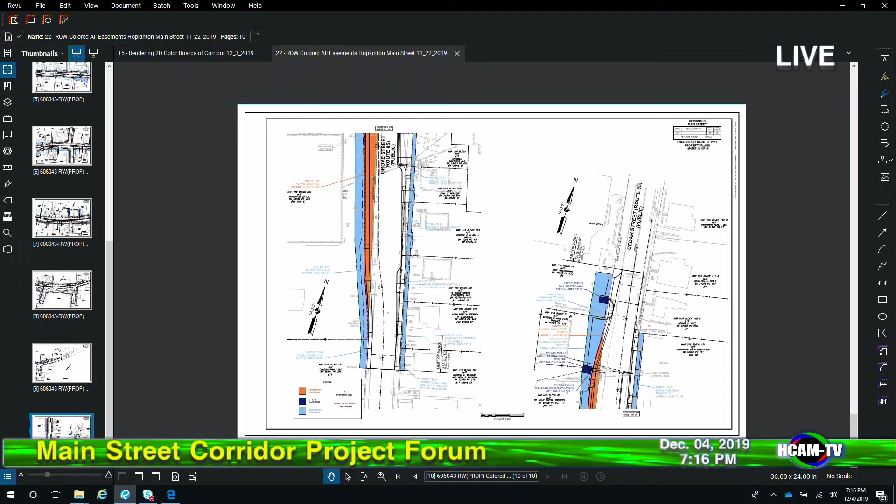So maybe scroll through a couple times as Joe finishes his thoughts. I'll finish with questions since I'm not an expert on this. But again, half of the count shows that half of the permanent easements are related to utility easements, and the other half are non-utility.

Looking at the permanent non-utility easements, by my count two-thirds relate to five properties—I think those are around the main intersection, the Sunoco, Cross Point, and a couple others, so maybe you can identify which those are. The other permanent non-utility easements, I believe 11, relate to 11 individual properties, one each, mainly pertaining to sidewalk easements. Is that right, or do you want to walk us through it?

I can go through the project from beginning to end. At the very beginning limits, we aren't taking temporary easements for the first couple of properties within the limits of work. However, as we go along, the light blue is temporary, the orange are permanent, and the dark blue are permanent utility easements. The orange are taken for a variety of reasons.

You've mentioned two of them for sidewalk purposes or for the realignment of the roadway at the major intersection. At this location, there are a couple of smaller ones for signs or for mast arms for the signal at this intersection, or in this particular case, this driveway is being included as part of the signal timing. So they have a loop being placed in their driveway, so it will also call the signal. So there's a permanent easement there, so that can be maintained.

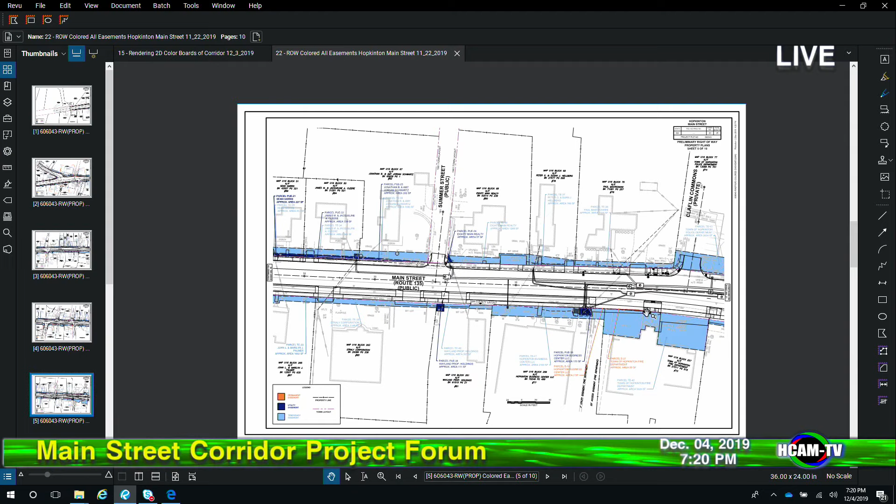Again, mostly temporary easements in this area. There is a very small sliver of a permanent easement across here, just for minor widening of the sidewalk in order to maintain a minimum sidewalk width to meet Mass DOT standards. When you say a minor width there for that sidewalk, how many inches or feet is that, roughly? It varies from basically an inch up to, at the widest point, about a foot. There's a little kink in the layout line right here, so we're smoothing that out.

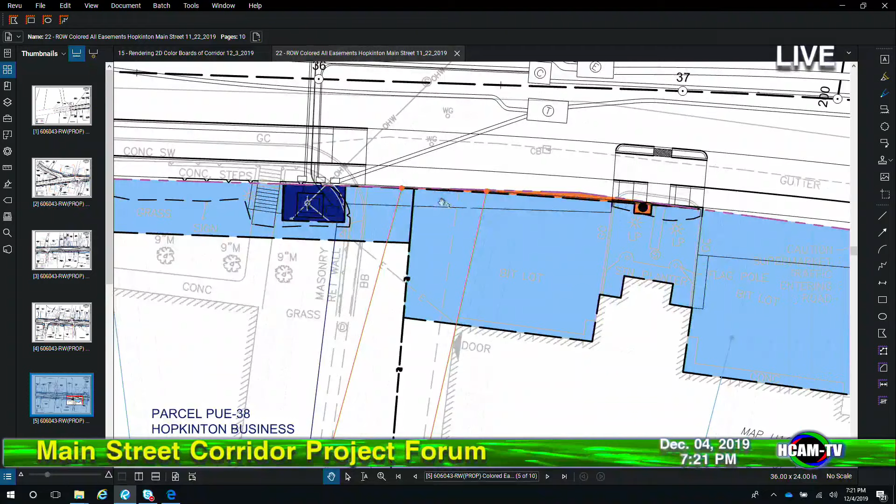This permanent easement here is for the new signal post for the new hybrid signal going in at this location. It will act as a flashing beacon for pedestrians to cross, as well as provide the police and fire departments access to get their vehicles out quickly. It will call the signal, they can press a button, and it will stop traffic on Main Street to allow them access out. So that's a major safety improvement.

Amanda, why is the temporary easement so wide on that lot or two right there? So part of it is because we are putting in the Opticom system, which is what they'll use to trigger the signal, so we have to run conduit into their property. In addition, this is in the area where the undergrounding is beginning, and we have to run a new underground connection to these buildings, so we're taking temporary easements up to the building face in this case.

Which property, is that the fire station? Yep, that's the fire station. This is a town property. I would like to point out, as Amanda goes through this, the light blue area represents the temporary easements, and about 65% of that area is used as a convenience area for the contractor to actually perform his work. There's a good chance he may not even access that full area of the easement, but it's provided just for the convenience of doing the work.

The state makes us provide that extra buffer for convenience, so they're not working from one side all the time. We've all driven around Massachusetts and seen these projects elsewhere, and one thing I'm worried about is the staging of piping and construction vehicles in the evening. How are we going to manage that in our downtown area? Does the easement allow for piping to be staged overnight for drainage and so on?

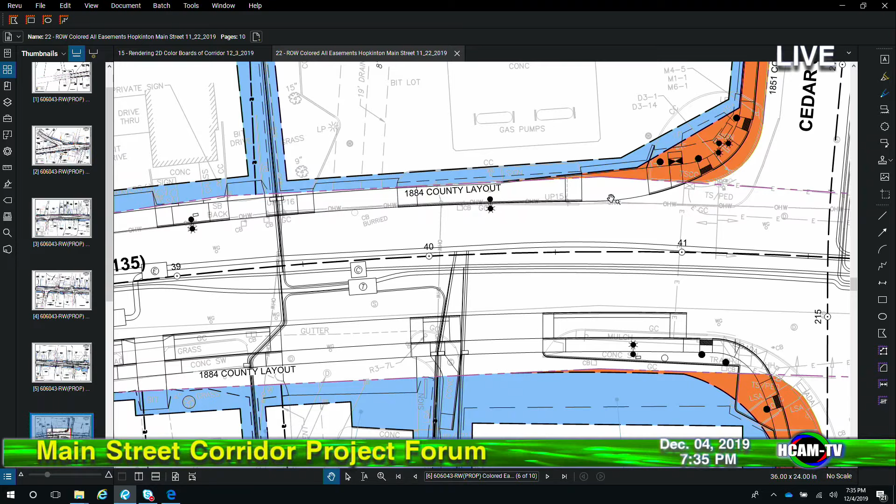It varies in width. Some places it's 60 feet wide. So if the existing roadway is only 30 feet with two 5-foot sidewalks, they have an extra 20 feet of right-of-way that they haven't utilized yet.

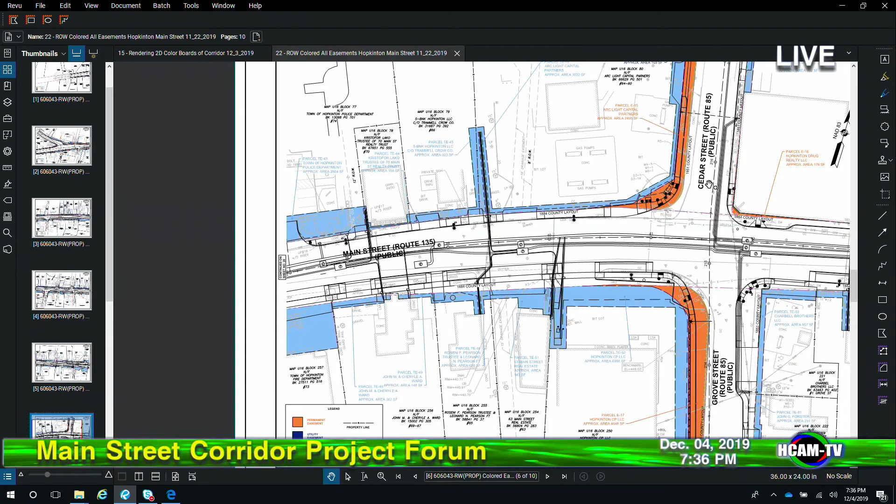It does vary in width out here, but the layouts do vary from year to year. This one, Cedar Street, was laid out in 1851. So they are old in some cases, and they've been updated over the years in other areas, but these have been in place for years.

This is a common thing we see in our projects, because when the layouts are established in the 1800s and 1900s, whether it's a 60 or 80-foot right-of-way, people are accustomed to seeing the edge of roadway as being, oh, that must be where the property line is. And when you think about how these roads were laid out for horse and buggy or whatever the accommodations were then, the cross-sections could be tighter.

So as traffic becomes more prominent and a variety of different users use the road, whether walking or biking, the cross-section creeps and starts to increase from what it was in the 1900s to current standards. That's where people see that their curb's moving in and think you must be taking their property. In fact, a lot of people don't realize that the first 5, 10, 15 feet to get to that 80 feet, 60 feet, or whatever the roadway cross-section is, it becomes a little surprising.

So I think it's important to recognize the technical aspects of the right-of-way and these various widths. But I also think it's important to recognize that we've got folks who've lived along this corridor, some for 40, 50, 60 years, and they're used to seeing that grass.

And I spoke with one of them. I've actually spoken with several of them recently. One of them was at an address where there's that stone wall, and we've got to move it.

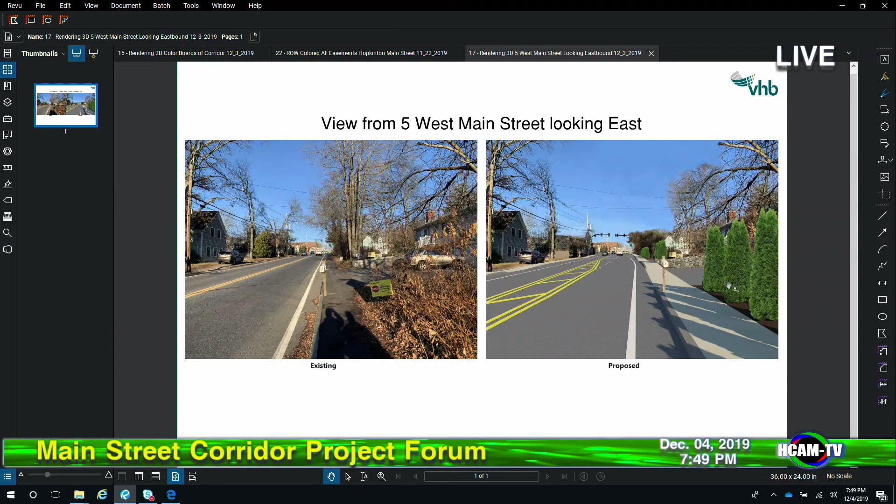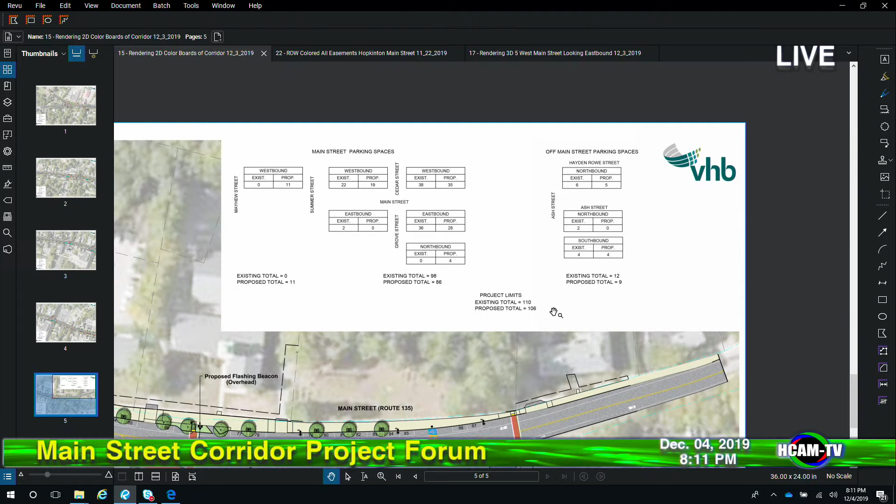Overall, there were 110 existing parking spaces. In the final condition, we have 106 proposed. Some of that was because we took out a couple of parking spaces on Ash Street, and in other areas because of the inclusion of bicycle accommodations. We also had to remove spaces here or there because of hydrants, which you can't park too close to, or crosswalks, which have regulations requiring you to stay 20 feet away. We did our best to maximize what we could get out there, using the tightest spacing we could while still making them parkable. You don't want someone getting stuck out there.

So we also looked at trying to carve in new parking in some areas because we had to eliminate it in others. So while a couple of parking spaces were eliminated here, we were able to carve in new parking on the opposite side of the street.

It's important that we point out the pain points when it comes to parking. This is the Muffin House, a fairly new business in town, which has 2 parking spaces outside it today, if I remember correctly. Those 2 parking spaces unfortunately can't be saved, but we did add additional parking across the street. So there's a bit of a dynamic there.

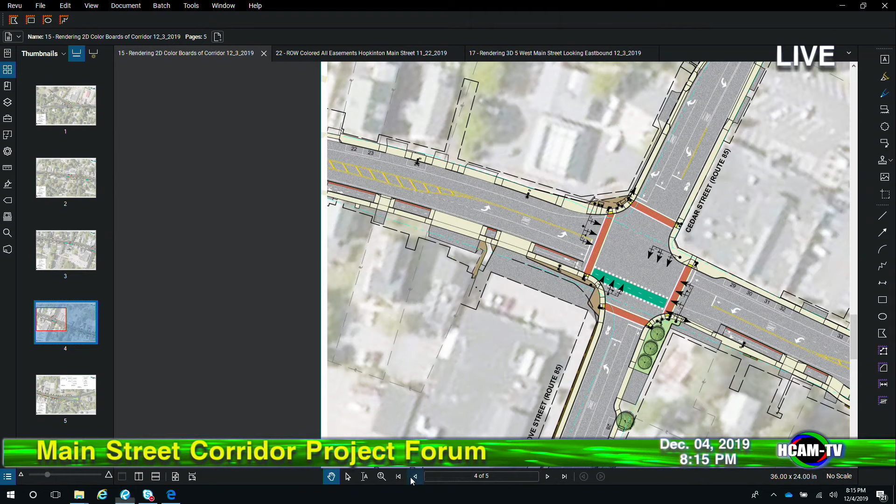I did want to point out that we carved out 4 additional parking spaces along Grove Street that were not there in current conditions. Again, we did our best to provide parking in locations where it doesn't currently exist, to mitigate for the fact that we had to remove it in other spots. There were a couple of spaces on this side of the street — while those spaces are no longer there, there will still be spaces along this side, and parking was actually extended down past Summer Street until just short of Mayhew. So new parking is being proposed along this side of the roadway in an area where it currently does not exist.

The second pain point I'd like to point out is at the barber shop, just west of the intersection. There are 2 spots, if I remember correctly, outside that business today. Those 2 spots unfortunately can't be saved either.

Correct, but we did these two: parking across the street, and there's the police lot parking just another 10 feet down the road around the corner, with 6 spaces there.

But that's one we've looked at from many different angles. Unfortunately, that is a pain spot. We have to own that, acknowledge that. It's one of the tough pieces of this puzzle. But I think we've done everything we can to get parking as close to it as possible.

One of the things about this entire corridor project we have to remember is that we're working on a plan that's going to create a steadier, calmer flow of traffic through the community. So when you park across the street, open the door and step out of your car, the traffic should be a little calmer going through there.

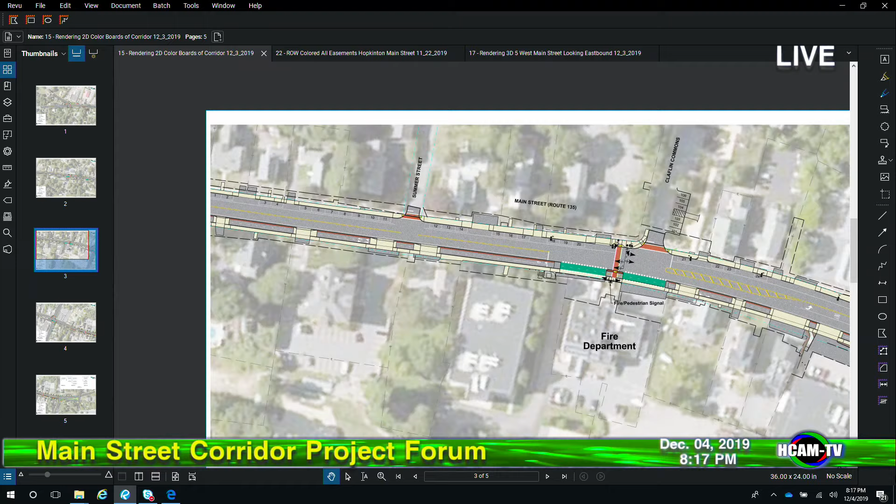That's a good point. From a traffic calming perspective, there's a pretty wide pavement out there today. One of the benefits of the project is that we are capitalizing on that. While we are taking some permanent and temporary easements to construct the project, the majority of the improvements are going into the roadway.

So in a sense, if there's no parking on one side of the street today and people are driving along, they have the ability to go around and come through town pretty quickly. This is going to tighten things up, and studies have been done showing that when corridors are tightened up, with striping that designates the travel lanes on the outside and inside, and the curbing and the shoulder, that has a traffic calming effect. So those are all positive things coming out of this project as well.

An example I can point to, since I'm in that area quite a bit with my kids, and Mrs. Kramer has one more than I, is the new traffic calming measures put in place outside the schools, the high school and middle school, along Grove Street. That traffic now moves through nicely. The kids aren't queuing up anymore to go in and park for drop-off. I see that every day, and the traffic moves smoothly.

It's 20 miles per hour. I never see it backed up. So if we can think about that kind of concept coming to the corridor on a broader scale, maybe that'll help some folks see what's going to happen.

Another point to that: it was a little painful for people to adjust to it at first. So we need to be a little patient as changes are made and let the adjustments happen, because at first it was really difficult, but it has calmed and people have accommodated it, and it does make smoother traffic through there.

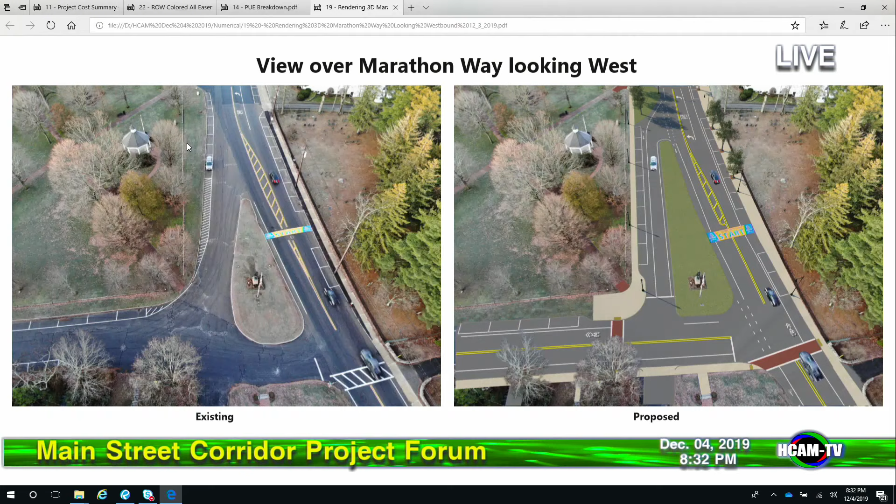And then I would add, Tom, that what I think is happening at the common, as I look at those pictures, is it's going to look better, one. It's going to be more functional, two, because you got the sidewalk and the crosswalk, and the bump out is pushed back on the Doughboy, so it's more functional. And it's safer, because you got a one-way Marathon Way separated from the busy Main Street. So I think those are the three things that it does to the common. The entranceway to Ash Street too is much better squared up and can probably accommodate two cars at the same time.

And if I could just make two quick points: this plan was shown through the Hopkinton Parks and Rec Board recently, and they liked what they saw here. This plan was also presented again recently to the Hopkinton Historic District Commission, and they voted to support this plan as well.

And then for the last of our submitted questions, it has been said that repaving the road would cost more than funds already appropriated. Can you explain where that calculation comes from?

Yeah, Amanda, if you could pull up, there's been an estimate done by VHB engineers and their colleagues that would look at resurfacing the road only, doing some minimal drainage work in the center portion of town, and doing a kind of cleanup of the sidewalks in their current layout. That proposal is what's estimated here by VHB engineers.

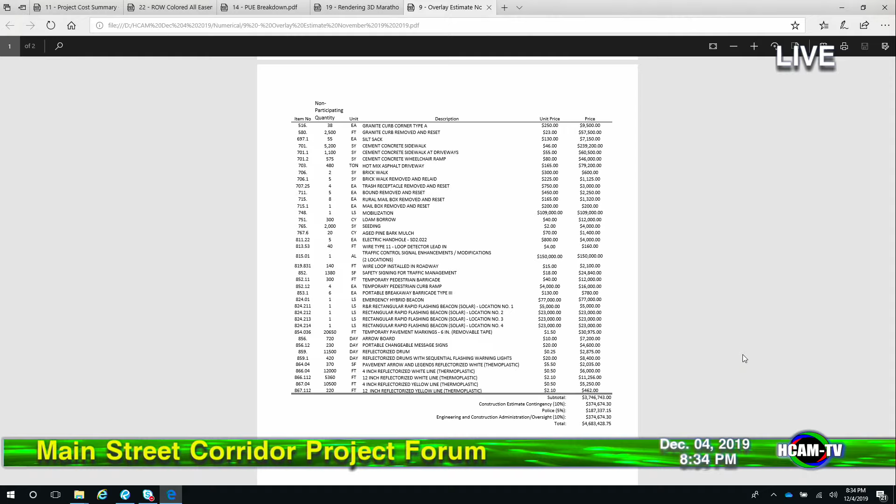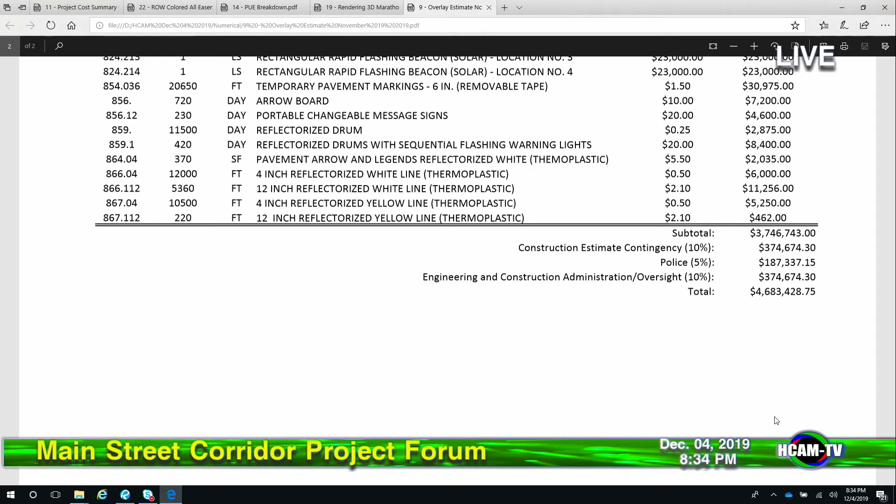I can't see the number from here, Tom, maybe you can. Still can't see it. I know it's about $4.7 million. Yeah, so it's 4.68 essentially million. So this is an estimate, and being in the construction business, estimates are just that, just like budgets are just that.

So it hasn't gone out to bid because this isn't a project today. But if town meeting, for whatever reason, does not support continuing with the project and things kind of fall apart, we would go out. So the reason we had this done is to answer that question.

We all know, most of the community understands, we've been walking down a path to do this Main Street Corridor project now for a good 10 years, if not 15, starting with Voices for Vision and others way back when. In 2010, we appropriated the first $400 grand for design work at town meeting. So we've been going down a path for 10 years.

So when Mr. Westerling comes to the Board of Selectmen each year for budget time and wants to talk about roadway improvements, road work, and where we're going to spend our money to repave, resurface, and remill, there's one stretch of road we've kind of ignored. We all know where that stretch is today because it's the worst stretch of road in Hopkinton. There are several stretches, but that one goes from Wood and West Main to Ash Street and the Common.

So we've intentionally ignored a strip of roadway because we were walking down a positive path towards this project. If we don't do this project for whatever reason, we've talked earlier this evening, we're on the hook as taxpayers in town for $3.4 million.

If we don't do this and we just repave, clean up the sidewalks, and fix some of the drainage in some of the worst spots towards the center of the intersection, but we don't straighten the intersection, don't underground the wires, don't change Marathon Way, don't do the work with the bike lanes—we don't have the bike lanes in this plan—we'd spend $4.7 million. So we'd have to go back to town meeting and get more money to do this work than if we stay the course, keep the state funds coming in, and do the work that's proposed.